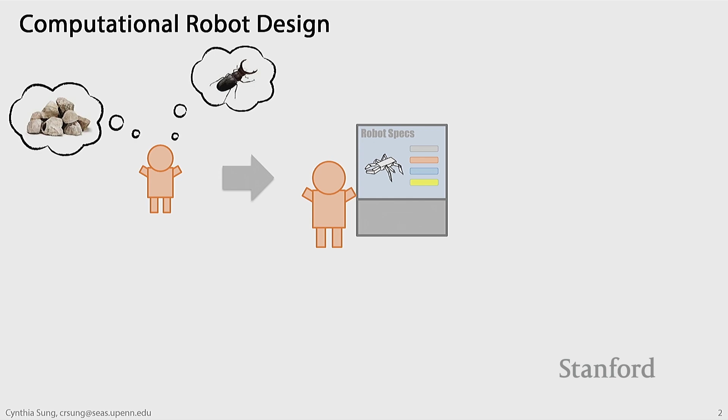Well, wouldn't it be nice if, rather than having every PhD student spend N years working on designing this robot, we were able to create computational tools that help these people to input robot specs, help them to make design decisions, really streamline the design process so that they can very quickly take their design, fabricate it in real life, and then use it in whatever environment they were thinking of, right? And so the key is really, what is it that goes into this system?

And originally, when we were trying to formulate these problems, we were saying, let's really try to specify what is a robot, what is a task, right? And so we came up with this way of describing these systems: a robot has some geometry, it has some joints, it has degrees of freedom, it has some controllers associated, right? These are all variables, design parameters that are associated with this robot.

There's also this task that we want the robot to accomplish, right? There's an environment that we care about. That environment has geometry, but it also has physics associated with it. We care about particular contact modes potentially. And then there's some objective, some performance that we want to achieve.

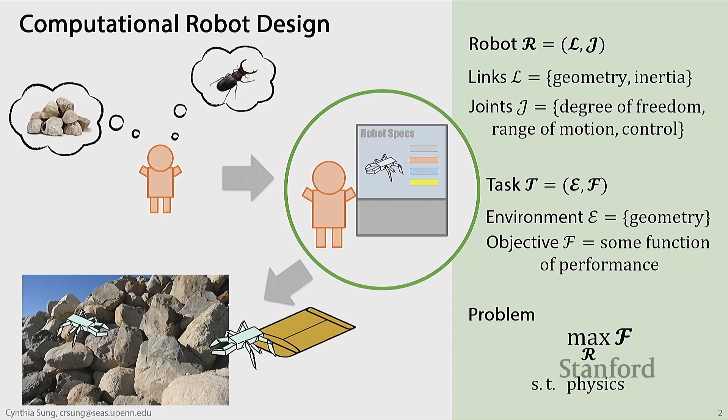And if we can write all of this down, then the problem of design is easy, right? We want to be able to achieve this objective over the space of robots subject to some constraints. And if we can solve this problem, we're done, right? So how do we solve this problem? During my PhD, we were thinking maybe one of the ways that we can approach this problem is through modularity, right?

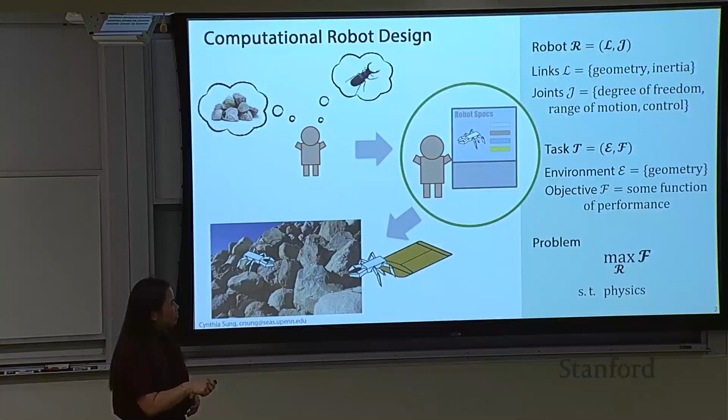Let's say there are these different robot components that we care about. Maybe we can create modules for each of these components and figure out when can we connect them together? How do we then simulate the robot in order to get it to achieve particular tasks? And we said, well, this part here is really hard. This task specification is really hard. So let's focus just on legged locomotion.

So we built this system here. We called it Build-A-Bot. This is a modular design system where you take these components here, which we hand designed, and put them into this 3D workspace. A user can come in and change the shape. These shapes are all parameterized, so we can keep track of their geometry, kinematic constraints, all of that. Users can drag in other parts and connect these parts together.

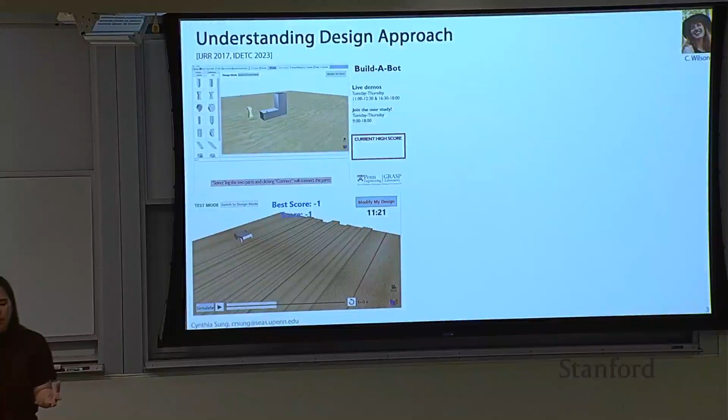And as they do that, we imposed a grammar on this system that said, if you're connecting particular types of parts together, then that implies that you're connecting them with joints or with motors, and there are certain controllers or kinematics that are associated with these structures.

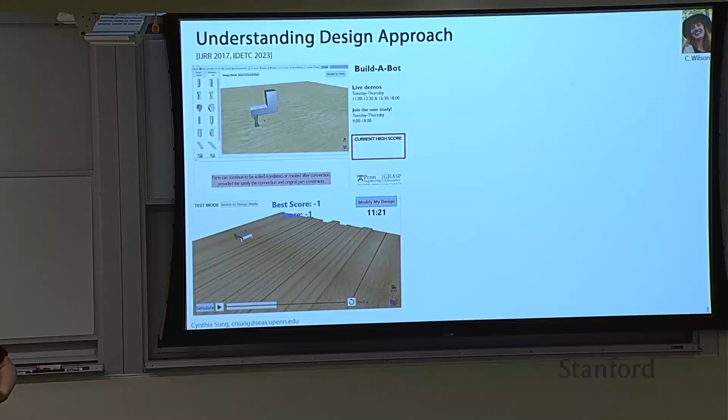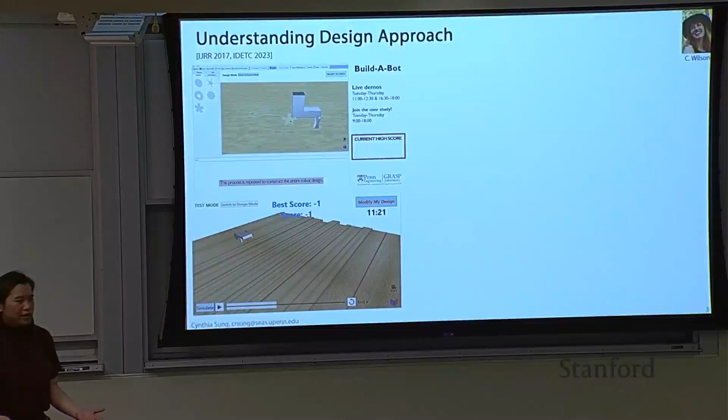And so in order to make sure that this robot satisfies fabrication constraints, we need to keep track of the geometry and also what the fabrication plan is going to be. And then if we also want the robot to be able to achieve some particular task, in this case we said, just get the robot to walk over this ground, then we can simulate the robot executing the particular gait associated with our grammar, right?

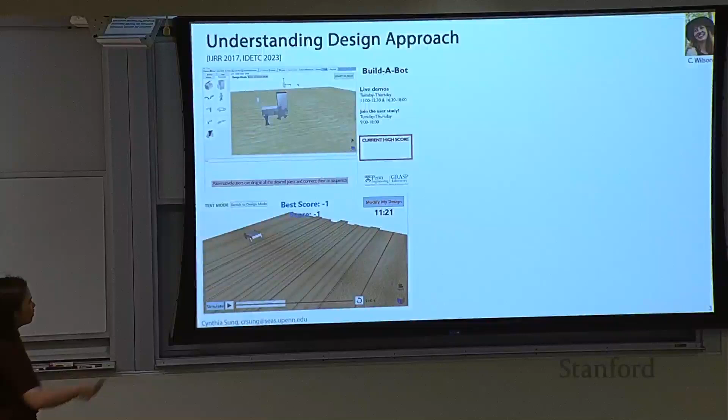So in this case, very constrained. And then tell the user what is going to happen. So in this case, they're attaching the different parts of the robot together, and then you'll see in a minute the robot being simulated. But basically, if we can modularize this design process, then we can very quickly provide the person with feedback as to how their robot's going to perform and allow them to make these design changes while making certain guarantees on geometric feasibility or the fact that this robot can be fabricated, right?

And so this software, we said, well, it gives us the first step, right? And so we can take these robots, we've shown that they can be fabricated, but let's see what other people do with this software. So what we did was, a couple years ago, we took this software and we brought it to ICRA, which was very conveniently held in Philadelphia at the time.

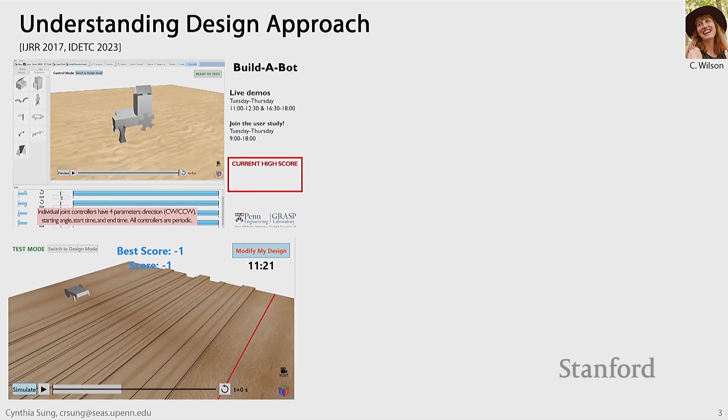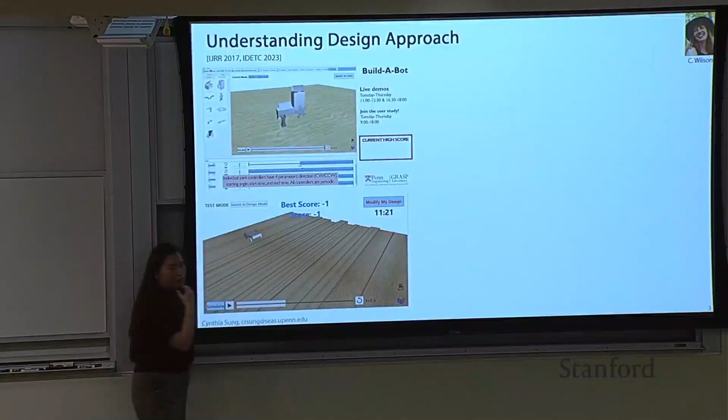And so we put a booth out, said, well, everybody, why don't you try to design a robot that's going to go over this environment? We'll give you a score, which is, well, how fast you can cross this finish line, and we'll see what people do, right? And we wanted to track how people actually approach the design process when they're given a task like this in a system that looks like this.

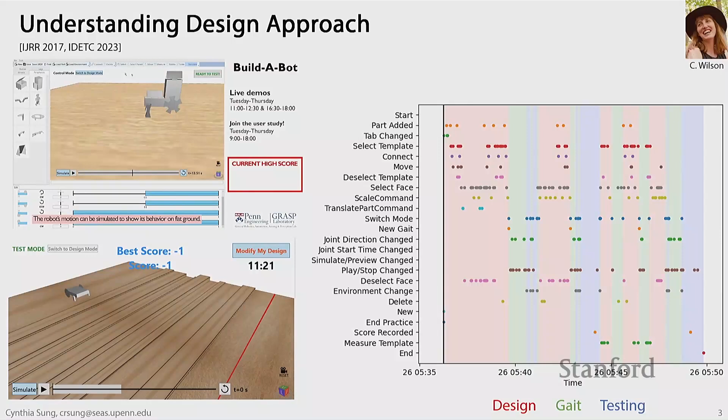So we ran this study with about 37 people. 37 people participated, ranging from undergraduates to professors to people in industry, basically the people that we could bother in the exhibition hall to interact with our software. And we tracked all of the different operations that they took in the software to see how they approached this design process. And so what you're seeing on the right here is what they did over time.

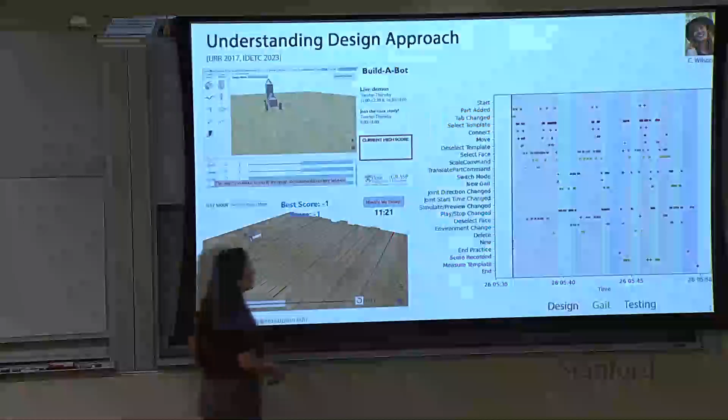And we looked at, well, what time are they spending in the design phase? What time are they spending in the gait design phase? How much time are they spending actually testing the robot? And observed the sorts of things that they were doing. And then afterwards also talked to them to say, well, what was your thought process as you were going through this design process? And so this here is an example of the sorts of actions that one particular user took during the study.

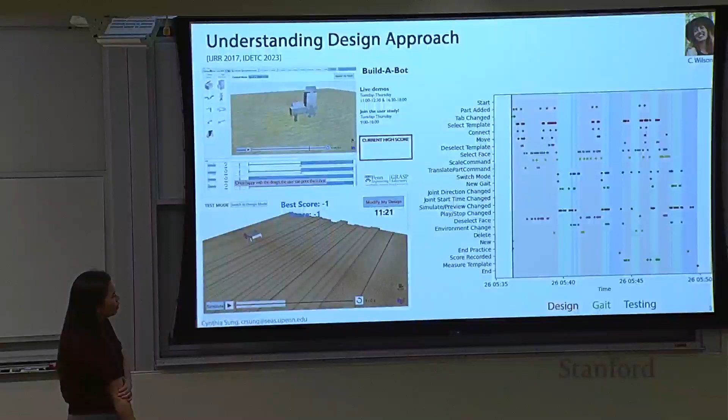And I think there are a couple of observations that I wanted to make, which is, well, we tracked their score over time to see how well the robot was doing. The max score that was achieved during the study was around 1620, I think. So this person ended up achieving something pretty close to the best score, but started out with a design that was not actually that great.

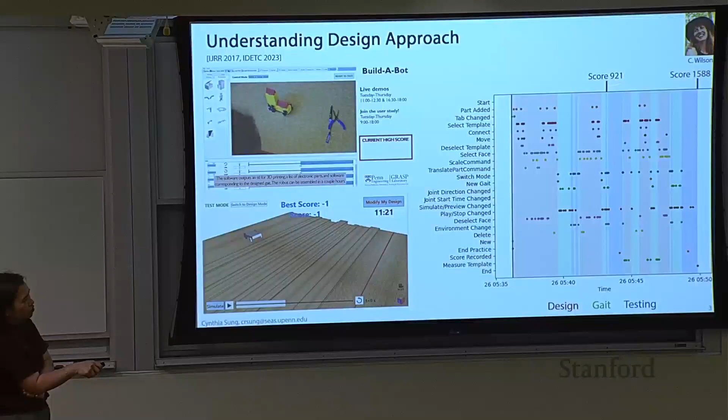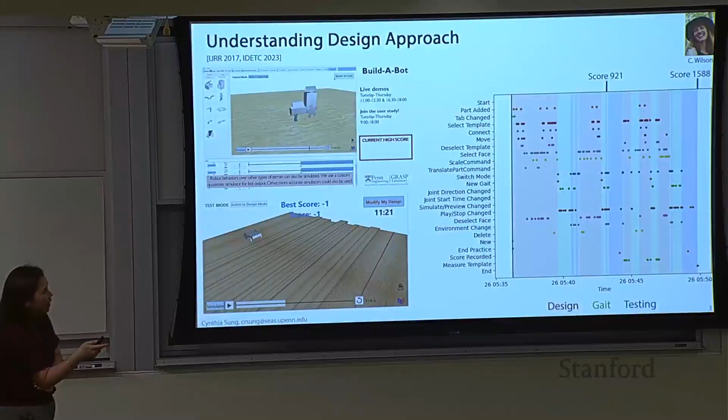But one really interesting thing that we discovered, together with Christina Wilson, who works in psychology at Oregon State, is that people really seem to zoom in on a particular design very quickly, right? And so if we look in particular at these lines here, we have the part added, how many times they modified the existing design, and how many times they deleted parts in the design, which we think means that they were changing their mind about what was going on, right?

And so there's a lot of parts being added at the beginning, right when they're starting with a new design. They did one test where they got kind of medium performance, right? And then this part here, not so much happening on the morphology of the robot itself, but a lot of tuning happening on the exact geometry, right? And so this was pretty typical for a lot of the users that were in the study.

And what we concluded was that people go into these design problems, and, well, what they're doing is not really solving the optimization problem that I showed before. They're not saying, well, what is the best possible robot? Let me look at the entire design space, really think about all of the robot parameters I can deal with, and then find the best design that's going to give me my functionality.

But rather, they really find something that they think is going to work, right? And then they kind of iterate over that particular design, right? And I think those of you who are designers, and even me myself, that's kind of the mode that we use for design, right? And so after seeing this, we kind of took a step back and said, well, what is it then that we're actually trying to achieve with these sorts of design approaches?

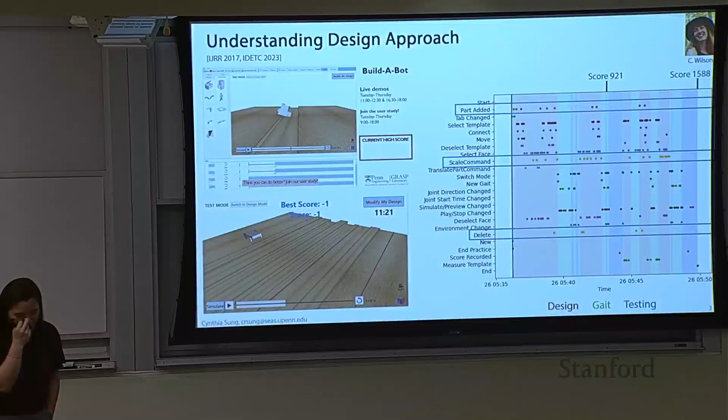Because at the beginning, when we started on this study, Christina had done a lot of reading in the literature and said, well, actually, what we've seen is that there's a difference between novice and expert behavior, and novices tend to have design biases, and experts tend to be more willing to explore the design space. And we did not see that here. We saw really everybody just zoom in on a particular design and iterate on it.

And what we thought was, well, maybe then what we're trying to do with these design systems, or when we design robots, is not actually come up with the optimal design. A lot of people are really just trying to get a design that works, right?

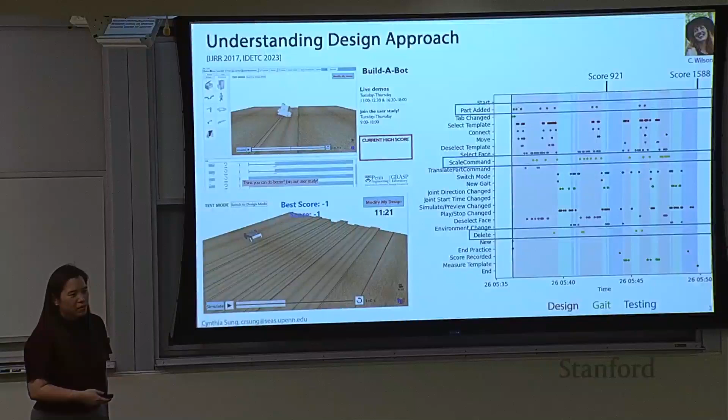And so this is related to some of the ideas that people have been throwing out in the mechanical engineering design community for a while, which is, well, what is the difference between how we think about mechanical design or robot design or design in physical spaces, and how we think about things that are very modular, like VLSI, or how we think about computer programs, right, which are also very modular.

And I really like this sequence of papers, one from 1996 and the following one 1 year after, 1997, where the first one is this title. It says, "Why Mechanical Design Cannot Be Like VLSI." And the argument here was, well, mechanical design is really, really hard.

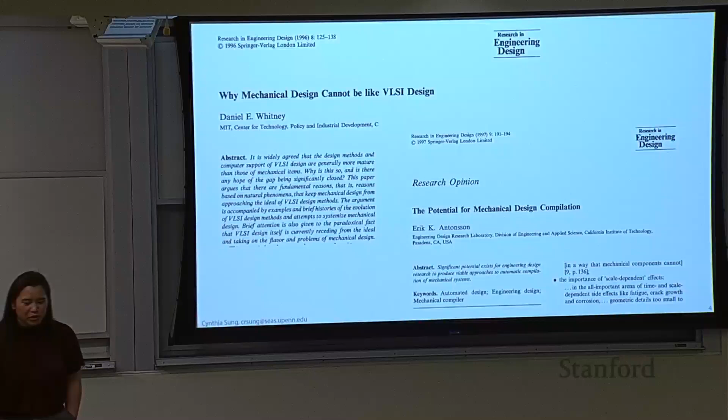The reason it's really hard is because actually mechanical design is inherently not modularizable in the way that VLSI and computer programming is. Because you have all of these mechanical components that are interacting with each other, and when you change one part, that affects the behavior of another part. And so inherently, we cannot actually deal with mechanical design in the same way that we deal with electronics, and so you kind of have to design the whole system altogether.

1 year later, there was this paper here from Erik Antonsson, which was called "The Potential for Mechanical Design Compilation," which is basically the complete opposite viewpoint, right? And this paper was actually written in response to the first one, where they said, well, you know, there are things in mechanical design that are very interconnected, very interrelated, and so when you change one part, you do inherently affect other parts. But there are also some things in mechanical design that are modularizable.

And maybe the key to thinking about mechanical design, or in my area of interest, which is robot design, is figuring out what parts of that design space can be modularized. And there's another part way at the end of the paper, which is also that

maybe also the key to allowing us to use modularity for these sorts of design approaches is to accept that sometimes when we take these compilation or these modular approaches, the design that comes out is not going to be optimal, right? And so as long as we can achieve particular functionality out of the design itself, and we can achieve something that's possible, well, maybe we're willing to make sacrifices on the other part for the ease of the design process. So this has really been an inspiration for the way that we've been approaching design and computational design for robotics in our lab.

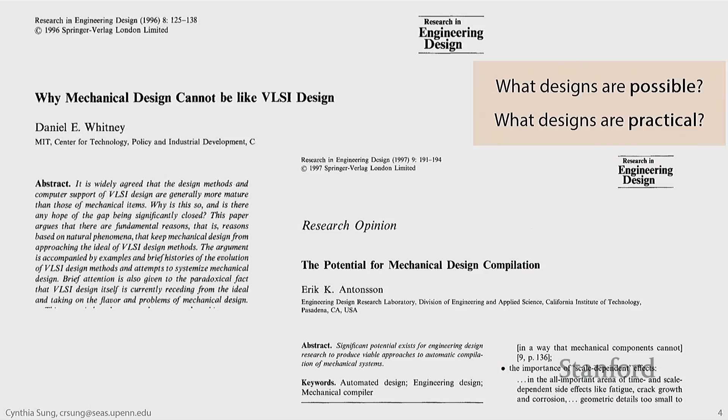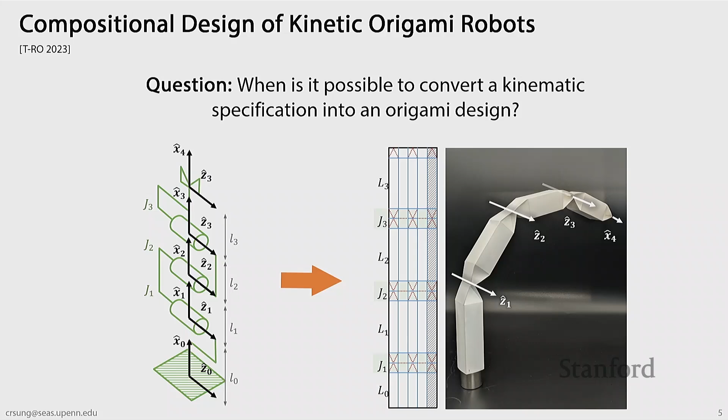So I'm going to start then with a project that we started thinking about, I guess 3 years ago now, where we said, well, let's start with a very particular type of robot. Let's start with manipulator arms. And let's not even think yet about actuation. Let's just think about kinematics.

And let's think about, well, if I want to create an arbitrary manipulator arm, serial manipulator arm, when is it possible for me to actually construct this arm? At the time, we had a very specific focus on origami-inspired design, but I'll show you later that actually the algorithm we came up with isn't necessarily restricted to origami.

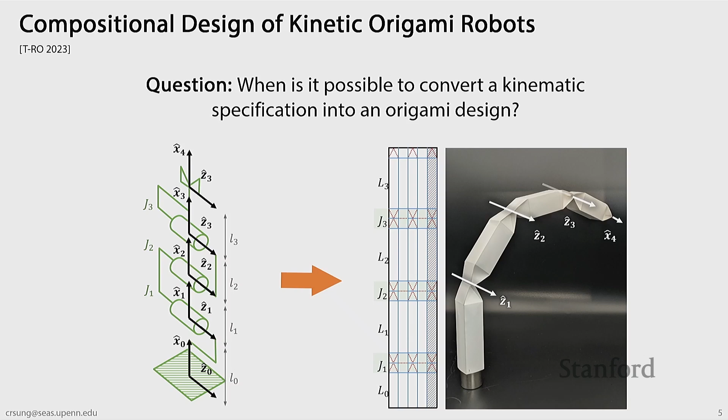But what we said was, well, all I want to do is make sure that if I have a robotic arm, I have a particular kinematic structure I care about, I want to be able to fabricate that arm. What is it that I need to do in order to achieve this particular kinematic specification? And so in order to do that, the way that we're going to specify these kinematic arms, now the task specification is very clear. We're going to use the Denavit-Hartenberg specification, which is probably the most popular way of specifying robotic arms, right?

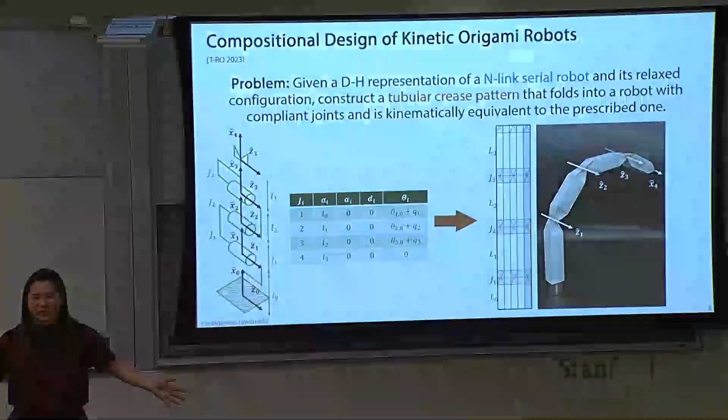So how many people here are already familiar with Denavit-Hartenberg? Okay, some people. So the idea behind Denavit-Hartenberg is that, well, actually what I care about is not the full structure of the robot, but what I care about is these axes of motion. So this is a drawing of a 3-link manipulator arm with 3 revolute joints. So the cylinders are revolute joints, and the axis of motion is down the center of the cylinder.

And if I want to describe the kinematics of this arm, I don't actually care where the joints themselves are, but I do care where the axis of motion is. And the axis of motion can be described by 4 parameters. So the 4 parameters tell me the direction of this axis of motion and the location of that axis of motion relative to the previous frame, right? And so this allows me to describe the kinematics of this structure. And if you want more detail than that, then Denavit and Hartenberg have a really great paper describing exactly what goes into this specification.

But what's interesting here is that basically this specification tells me exactly where I want the axis of motion to lie, but I don't care where the joints are, which gives me an extra design degree of freedom, right? So if I can place the joints really anywhere I want, that allows me to make this robot fabricable as long as the axes of motion are correct, right?

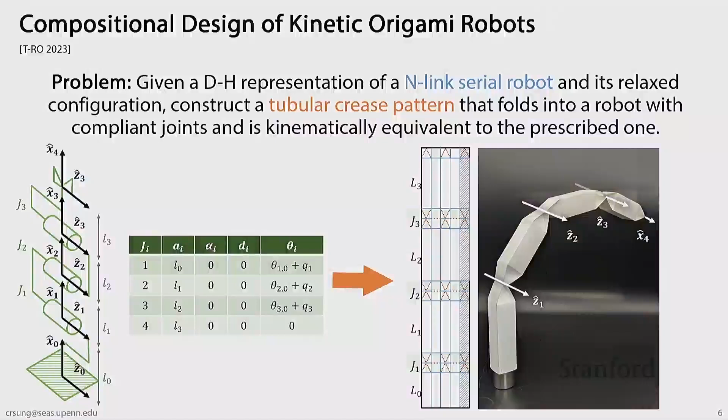And so we said, well, how do we go about then designing structures that are physically realizable, that achieve these kinematic specifications? And before I tell you our solution to this problem, I'm going to take a sidetrack. So the sidetrack that I'm going to take is on path planning under curvature constraints. So many of you have probably heard of Dubins path planning, or planning for cars or airplanes, right? These are vehicles that have been studied for a really long time in robotics research that can only follow paths with some minimum curvature, right?

So if I want this car to go from this position, this orientation, to that position, that orientation, I can't take a straight line path. I need to follow a path that consists of curves, straight lines, and then additional curves, right? And back in the 1950s, Dubins showed that in 2D, these kind of curved, straight, curved paths are shortest length paths for these sorts of planning problems. And in the 1980s, I believe, Hector Sussmann showed that in 3D these paths can also be used to describe the sorts of paths you would take from starting positions and orientations to ending orientations and positions in 3D space.

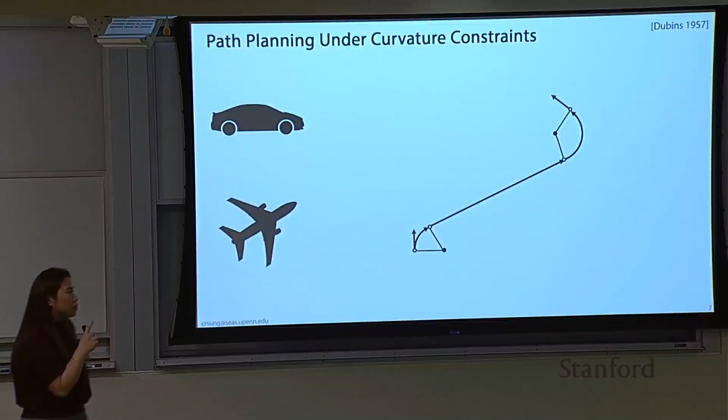Now, what's really interesting about these paths is that actually these are paths that robots can follow in 3D space, but they're also paths through 3D space that basically create rigid transformations, right? So if I have a frame down here and I have a frame up there, and I create a series of physical objects that implements these turning and straight line paths, then what I get is not a path that a robot needs to follow in 3D space, but actually a physical link that generates a rigid transformation that I can use to create a particular relative orientation and translation between my starting and ending frame, right?

And so we thought that this could actually be a way for us to approach the problem of design of manipulator arms, because what this means is that if we put a joint down here and a joint up there, as long as we can calculate and then create this path, then we have an arm that's fabricable, right?

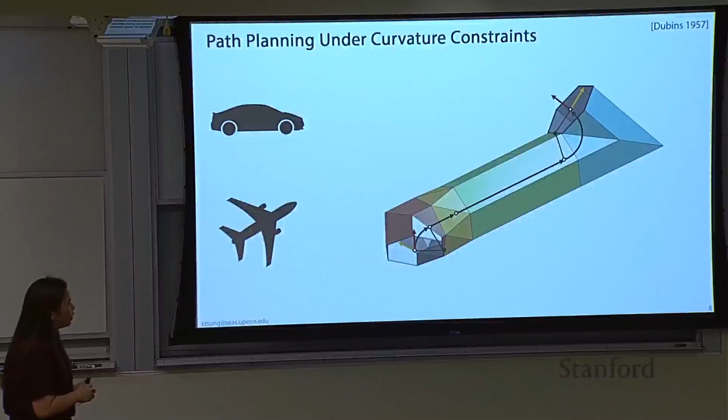So what my student did, Wei-Hsi Chen, was he designed, in this case, origami modules that implemented these different paths. So we have this module here, which gives you curved path rotation, this module here, which gives you straight line motion, and then additionally other modules that give you joint rotation and joint translation.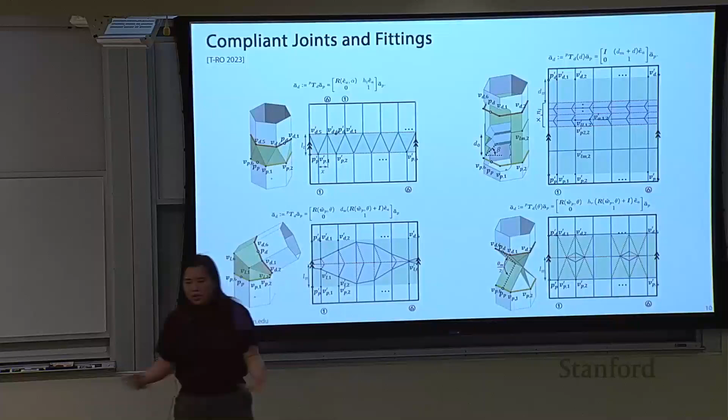And the key now then to designing a manipulator arm is actually mapping this design problem onto a Dubins path planning problem. And as long as we can solve the path planning problem and we can combine these origami modules together to create those paths, then now we have a valid arm.

So the key insight to doing this then is that actually when we choose a particular kinematic specification, in this case the Denavit-Hartenberg specification, which only gives us the axes of motion, the joint locations themselves are not necessarily fixed, right? And normally, when we're trying to design robotic arms as mechanical engineers, you try to take the joints and put them as close as possible to wherever the other joints are so that we don't have any of this extra mass or volume around. But in this case right now, I'm going to say we don't care, okay?

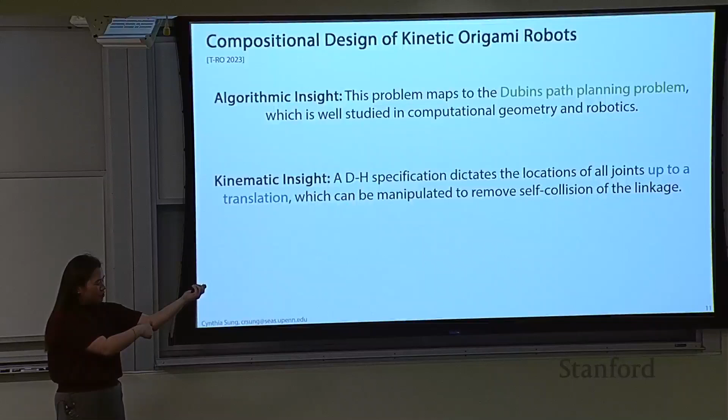So if I have my arm, for example, and my elbow here has the axis of motion down this line, actually, for the purposes of figuring out where my hand is going to be, my end effector is going to be, it doesn't matter if my elbow is right here or if it's over here, as long as the axis of motion is correct, right? And so I can use that extra degree of freedom in order to be able to design these sorts of manipulator arms that satisfy my kinematic specification.

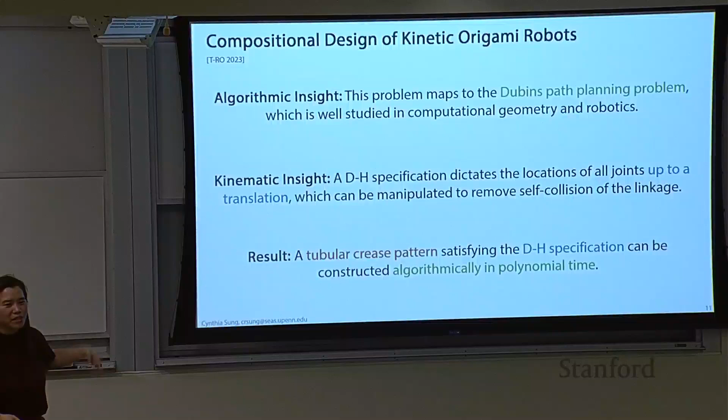The reason I can do that is because I can now pull from existing properties that have been discovered for Dubins path planning, that these paths can be calculated as long as my joints are sufficiently far apart, right? And so what I need to do now is basically go through this process of figuring out for every joint that I want to connect together, where should I place it on its axis of motion in order to bring it into a location where I can actually route these paths. Then I can convert those paths into these physical structures, and then I can do that iteratively over the entire structure of the robot, right?

And so here, what you're seeing is the process of designing a spherical joint. So what we have is these three joints here, which have axes of motion that all coincide here in the middle. That was the diagram that you saw at the beginning of the video. And then these are the paths that get automatically generated through this process of converting this problem into a Dubins path planning problem. Each of the segments of this path here get converted into the equivalent origami pattern, which in this case is a tubular pattern. So it can be either constructed through folding, or if you want to print out 3D tubes on a 3D printer, you can do that too.

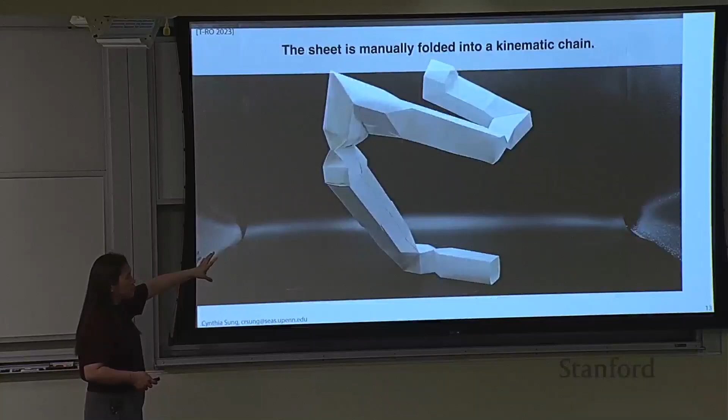But what happens is if we take this pattern and then we fold it, then we get a physical structure that lies along this path. And you can see the revolute joints in these three locations. If we draw where their axes of motion intersect, it'll be right at the center of this mechanism. So this here has the exact same kinematics as a spherical joint. Not to say that this is necessarily yet a spherical joint that you would want to use, but what we've shown is that it is possible to take these sorts of kinematic specifications and automatically generate some version of a fabricable structure that would have the correct specification.

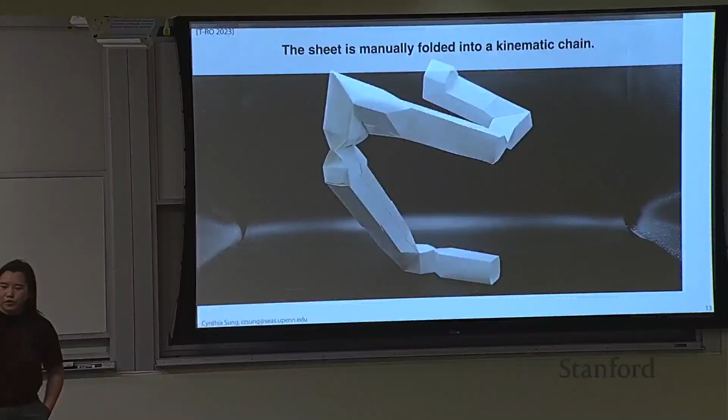So this process here actually works for pretty much any Denavit-Hartenberg specification for serial chains. And we've implemented these ideas, all of the modules, into a GitHub repo. If you're interested in designing your own manipulator arms or spherical joints or whatever it is you care about, you can download this code and input your own Denavit-Hartenberg specification and see what comes out.

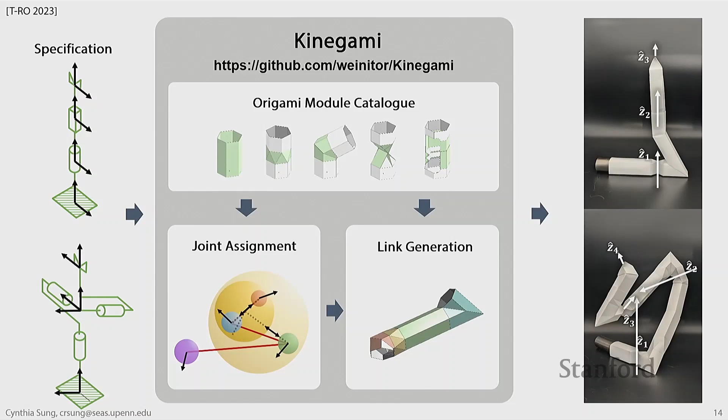So in this case, we basically said we just want a kinematic specification to a fabricable plan. What are we going to do with this result? Well, now that's the second question, right? How do we actually think about when these sorts of designs are practical? And so we decided that, well, maybe we'll try to use this sort of idea in order to design a quadrupedal robot.

Sounds fun, right? So what we decided to do was say, well, we want to design a quadrupedal robot. We wanted to have 8 joints throughout the entire body. In this case, this is not a serial mechanism, right? This is a robot with 4 parallel legs. But actually, you can break it down into 2 serial mechanisms by cutting the robot in half, right? And so the way that you can then take the tree associated with the robot and decompose it into chains is we can find longest chains throughout this graph, right?

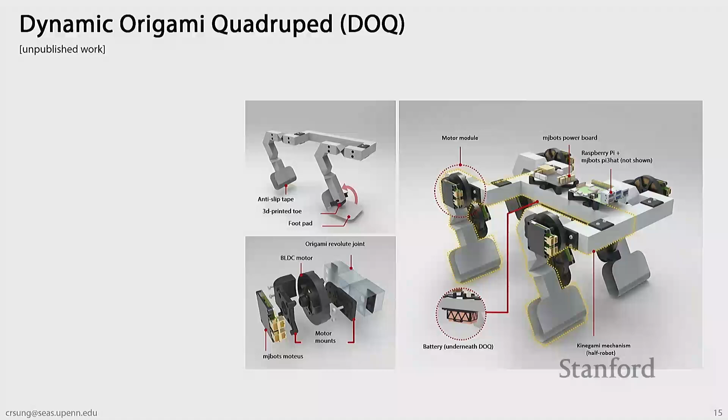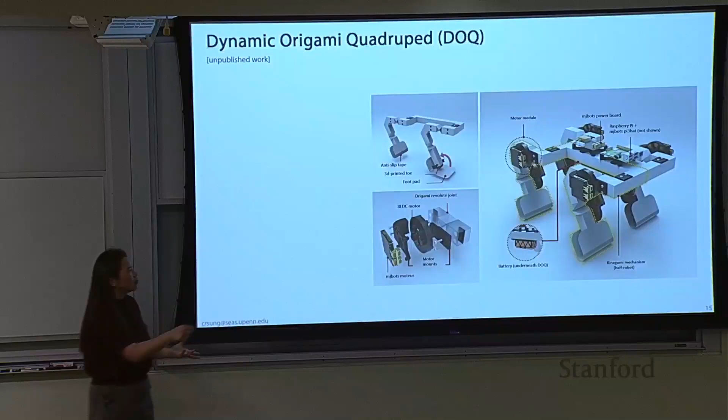And so now what I need to do then is if I want to design a fabricable version of this robot, I need to design the kinematic chain associated with the body. And then I also need to figure out all of the actuation, control, everything else associated with it, right? So this part here, presumably, is now relatively complete, right? I need to figure out where the joints are that I care about, and then I need to design this fabrication plan. The key now is how do I make this whole structure more compact in order to make this robot not really unstable, but still allow me to input all of my actuators, right?

And so the way then that we start thinking about this problem is we can still build on the insights from designing arbitrary kinematic chains I showed you before, but now we also need to take our actuation into account. Our actuation affects two things. It affects the volume of space that this actuator is going to take up, and actually the joint location affects how much torque it is that the motor is going to need to produce, which then affects its volume, right?

So the volumetric constraint is not too bad. Actually, since we were already treating this problem as a path planning problem, what we need to do is route these links through 3D space while avoiding whatever space the motors take up as if they were obstacles, right? And so these sorts of paths can now be generated that allow us to place these motors. At the same time, the torque requirement imposes length constraints.

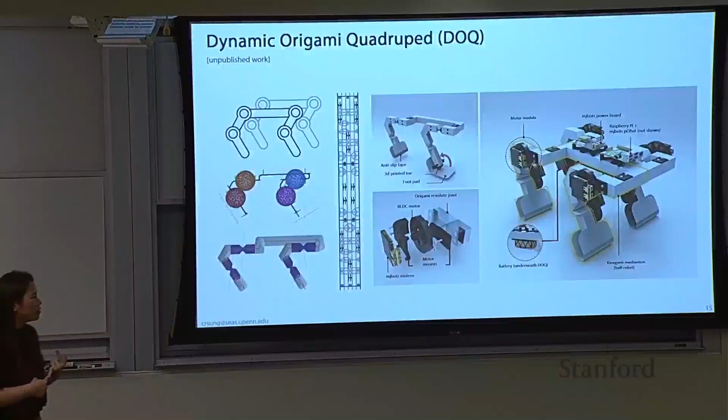And so now what you can also do is, instead of arbitrarily placing these joints in 3D space in such a way that these paths can be routed, we can add an optimization on top of that that allows us to make everything as compact as possible while satisfying all of the constraints associated with routing Dubins paths, right? So if we do that, then we get a chain that looks like this. This chain here has the kinematics that we care about for the robot that we're trying to build, but it also has space in there for us to mount all of the actuators that we've spec'd out to produce this robot.

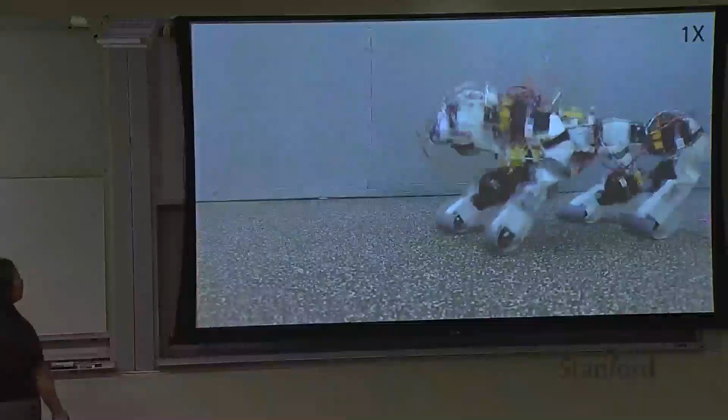So what you're seeing now here is the resulting quadrupedal design. This is a body that has been folded by hand by Wei Shi. The body of this robot, though, has been designed through this algorithm that I showed you previously, where he basically specified exactly where he wanted all of the joint axes of motion to go, and then folded this and then put all of the motors on. This is the robot walking, and then what you're seeing here is us also trying some more dynamical gaits, the robot bounding, and being able to withstand the forces and torques associated with creating these maneuvers.

I will say that this is actually the fourth iteration of this robot that you're seeing here. The first iteration that we designed, we actually forgot to leave room for all of the motors that we would need to put on top. And so when Wei Shi tried to mount all of the motors and electronics, none of them fit. There were huge collisions. It didn't work. But then we were able to add in all of the extra additional constraints associated with routing these paths around the motor volumes. And what you're seeing here is the result.

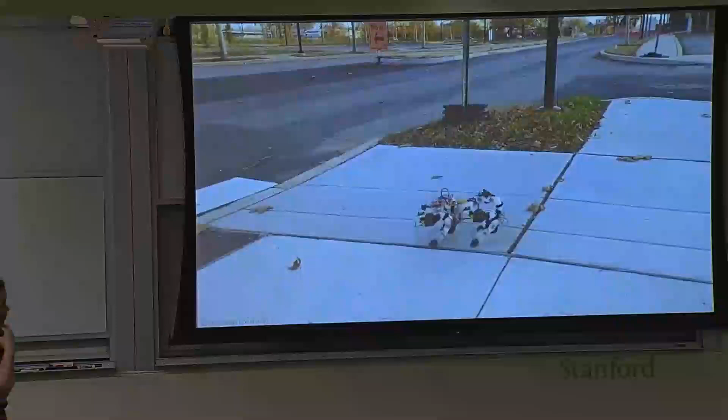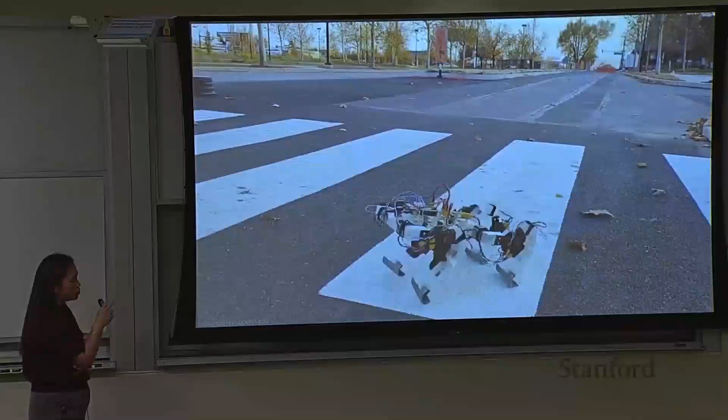So with these robots here, we've been able to take advantage of our algorithms for generating these bodies to iterate over the design within a few days at a time. So between the first version, which couldn't take any motors on it at all, to the second version was about 3 days. And then after that, every time we run the robot, we notice an issue, oftentimes material fatigue, then we can iterate over the design within another few days to a week.

And the degrees of freedom are also lower because we decided we didn't want to go for the full 12 at the beginning. But in terms of size and capabilities that we have, they are pretty similar to existing quadrupeds that other people have built. So, any questions so far?

Oh, yes. I guess just curious, how did you incorporate all of the force and torque constraints into the kinematic specification to make sure it doesn't collapse under its own weight? Sure. So the force and torque constraints, which I really glossed over here, I guess there are two different types that we need to think about mainly. One of them is the actuation torque, right? And then the other one is forces on the robot body that will affect its ability to withstand the weight of all of the other components.

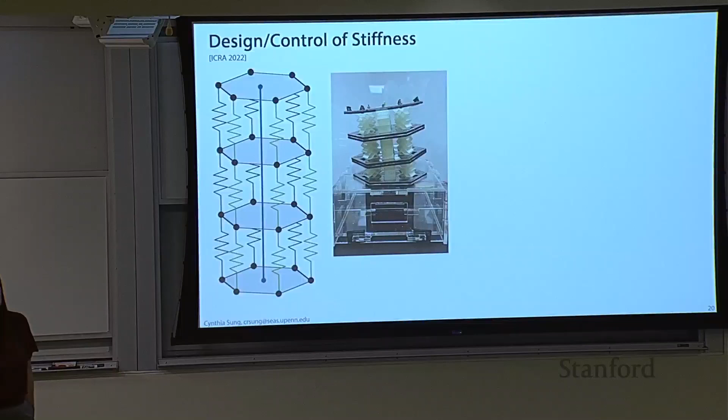So if I take a tendon and I pull down the center of this platform, the softer springs are going to compress first, right? And then the stiffer springs are going to compress. And the way that the structure deforms is going to depend on the stiffness distribution. This is a really abstract version of what was happening on the legged robot that I showed you on the previous slide, where in that case the stiffness is dictated by the particular geometry of the fold patterns, right? But we start with this abstraction because it allows us to think about the structure in a little bit easier way.

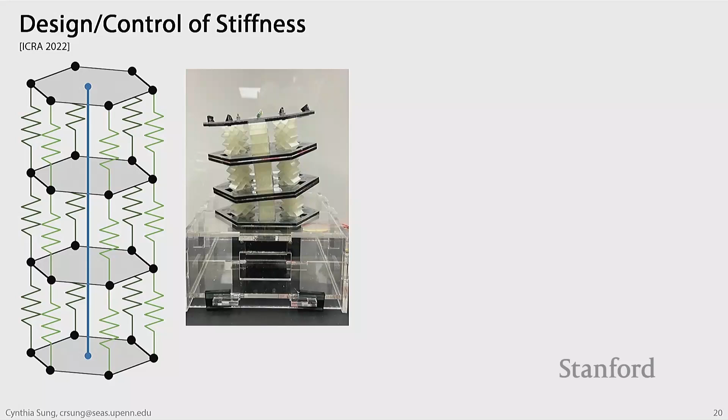So the way that this structure then deforms depends on the energy landscape, right? So if I'm pulling the string this slowly, then this whole structure is going to tend to bend in the direction that brings it to a state of lowest energy.

And what we did was that for these particular types of tubular structures, we can construct stiffness matrices associated with them, but those stiffness matrices have a particular structure in them, right? And so actually for structures like this, the tubular structures that we've been designing, the way that these robots deform has an analytical solution. And so we can construct these matrices associated with kV. These are the stiffnesses at each of the springs.

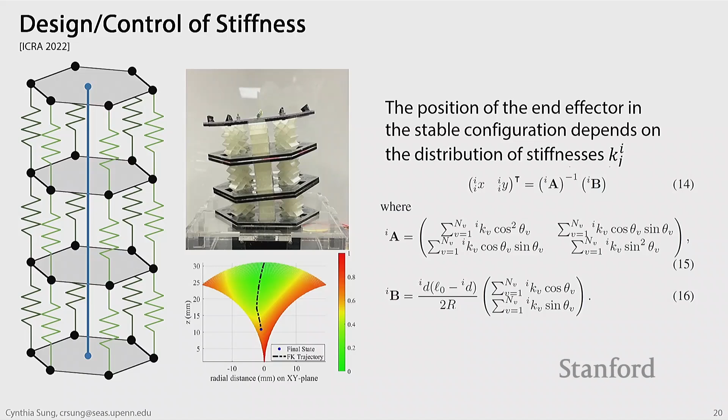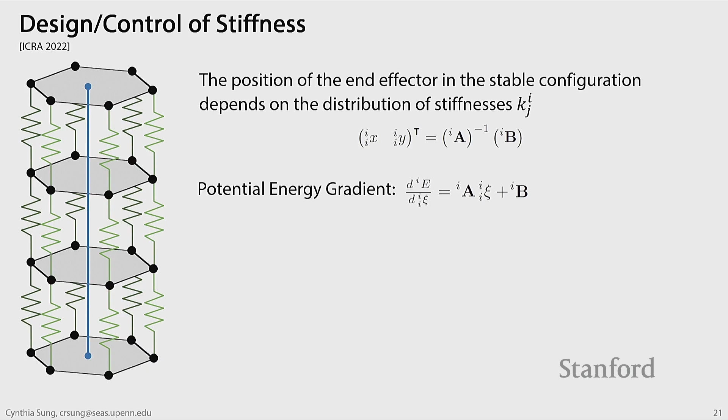Here we have theta V. V is basically the ID associated with springs along the circumference of this structure. And N_v is the number of springs around the circumference of this structure. And then the way that this structure then deforms is dictated by basically this matrix equation. So what that means is that actually if I have this sort of solution, then I can use it in order to figure out which direction the structure is going to deform when the stiffness changes, right? I can find energy gradients in this energy landscape, and I can manipulate those gradients in order to get the structure to tend to a particular new pose.

So what we found is that what we can do is use gradient descent-based approaches very similar to potential fields and potential field planning approaches, right? Where basically we're getting these structures to move along these energy landscapes and tune the local minima of these energy landscapes so that the deformation is the one that we care about. What we do here is not change the lengths of tendons or actuate DC motors the way you might normally think of in traditional rigid robotics. But what we're thinking about here now is stiffness change, right? And so these correspond to material properties that are associated with the springs throughout the structure of the robot.

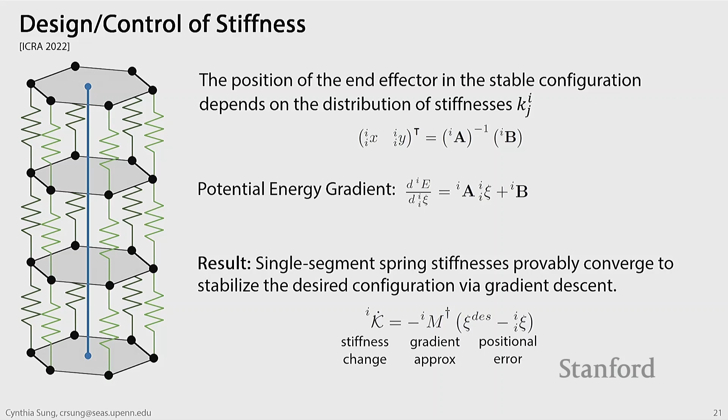So if I take this idea and I say, well, what I'm going to do is now assume each of my springs is an actuator, right? And let's say that I want this manipulator now to bend in a particular way. For this particular scenario, I want it to be such that when I pull a tendon down the middle, the whole structure is going to deform and the robot is naturally going to get its end effector to this purple triangle. I can do that by manipulating the stiffnesses of these springs.

So what you're seeing here in this animation is each of the thicknesses of these springs here corresponds to its stiffness. This robot here is basically just following gradient descent in order to update those stiffnesses and get this robot to deform into the right shape. Once this happens, I can now take this stiffness distribution and use it as part of my design if this is the particular deformation that I care about, right?

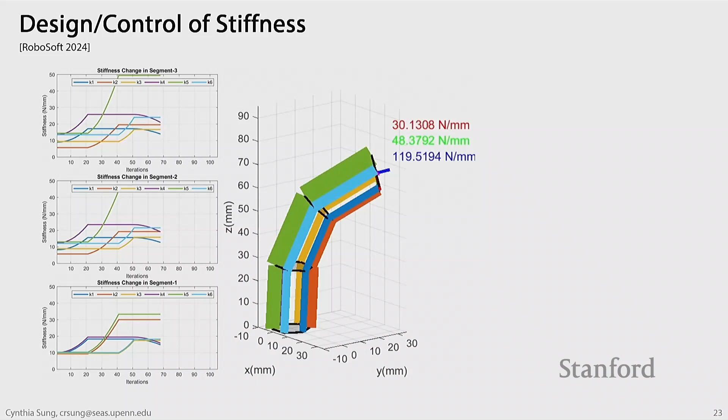What's really interesting is that if I'm modeling these soft robots in this way, then I have a lot of extra degrees of freedom, actually, right? And so this robot here, I can get the whole structure to deform so that it curves and the end effector hits this purple triangle. But I can also then uniformly scale all of the stiffnesses so that I can achieve these configurations with greater stiffness or greater softness, right? And so actually, since the system is now over-actuated, I can use these extra degrees of freedom to tune the stable configuration and the strength of the robot at the same time.

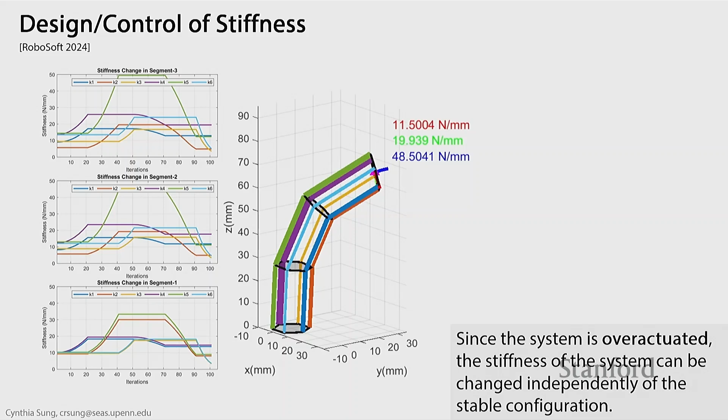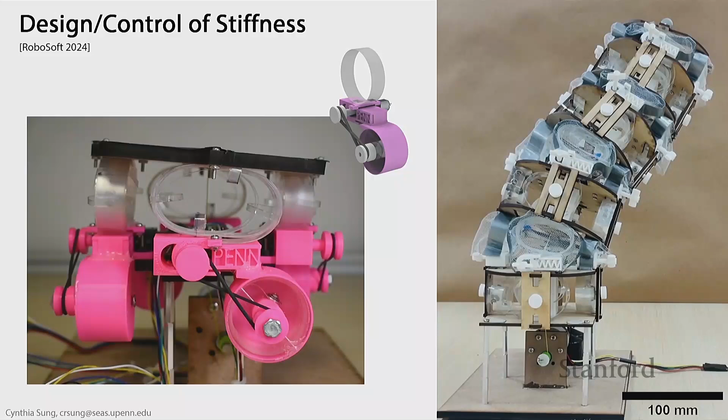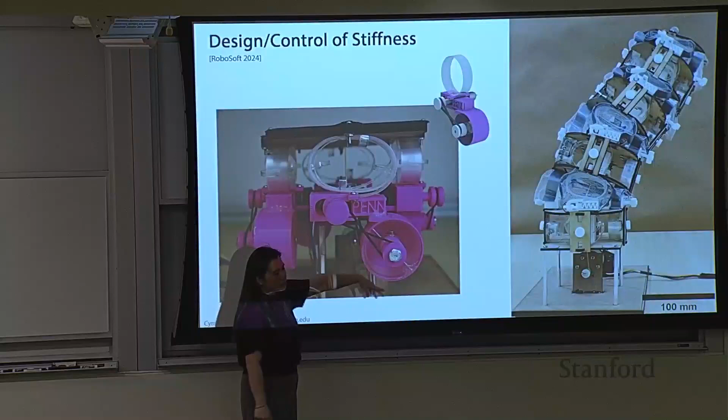So these sorts of ideas, I think, really highlight the way that our lab is now headed, which is to think about how these sorts of design problems can be cast as also these planning problems. And I can take these sorts of ideas where I say, I want these robots to follow gradient descent in stiffness and implement them either in real time, which is what you're seeing here, where we designed these electromechanical actuators to be able to tune stiffness on the fly. Or we can take the results of these sorts of approaches and then implement them onto fabricated systems. What you're seeing there is the same system, but without the motors. And so that one, you change the stiffness and then it deforms in a particular way, in this case, an S-shaped curve.

So those are the sorts of ideas that we're now starting to think about in terms of how do we think about these extra properties of the robot, these sorts of material stiffnesses, as an example, and treat them as actuators, potentially, or actuatable degrees of freedom that now allow us to take advantage of existing approaches to do design, or, if in the future we manage to get these tunable stiffness actuators to be smaller and more compact, for planning.

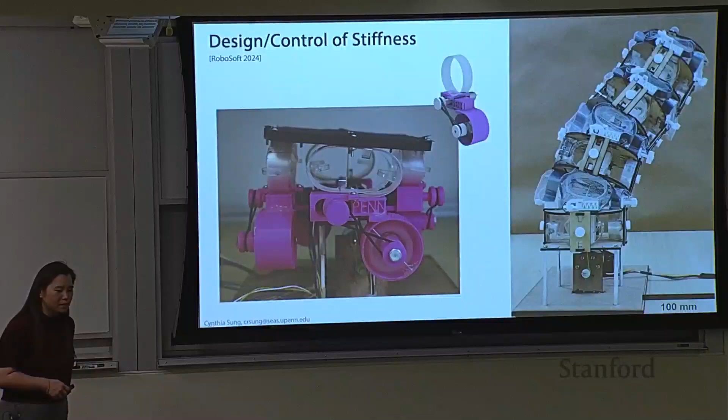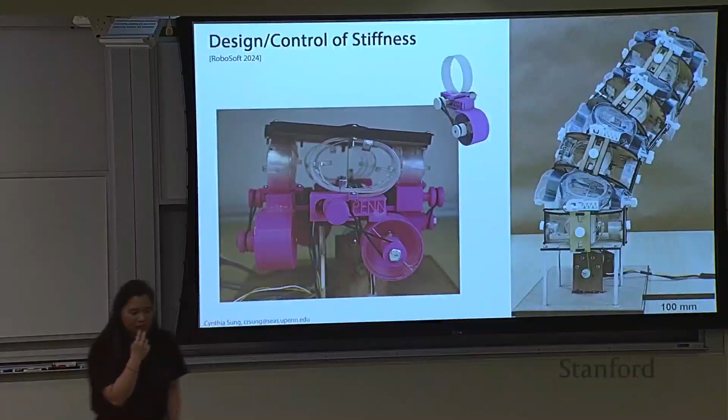Okay. So in this case, I talked about material stiffness, but I wanted to take these last few minutes, I believe, yes, to give you a preview of where we're taking this work in the future beyond just robot body design. So these sorts of ideas work not just for soft robots, but we've started to learn that they allow us to start thinking about how robots also move on compliant surfaces, or how we think about the compliance in the robot combined with the compliance of the environment.

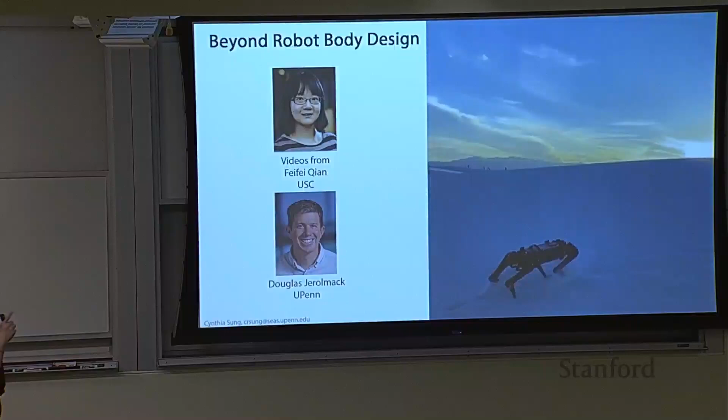So what you're seeing here is videos not from me. These are videos from Feifei Qian at USC and Doug Jerolmack at UPenn of a quadrupedal system, commercial quadrupedal system, using its gait that it comes with to try to walk on a sandy environment. What happens here is that the sand is very compliant. You're seeing it's kicking up sand every time it walks.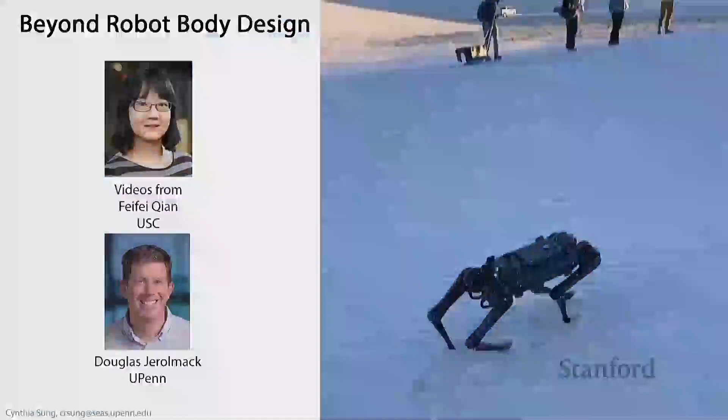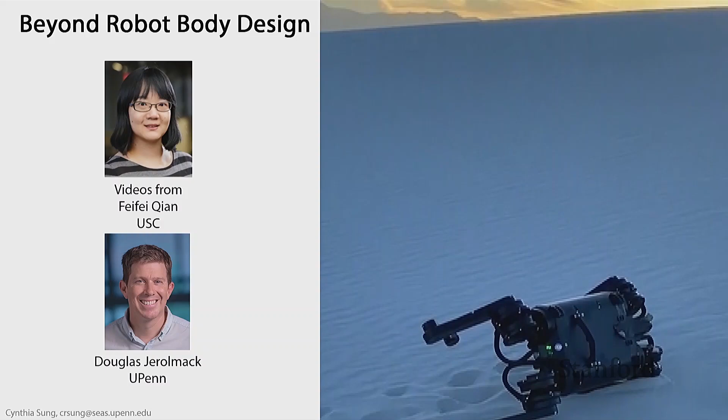Depending on how much compaction the sand has, the robot is feeling different forces coming from the ground. And when it gets to a particular type of ground, it can't handle it, right? The way that the ground deforms makes the robot go unstable, and it flips over, right? At the same time, these folks have found out that actually you can use signals from the motors in these robots in order to detect ground forces as the robot is walking.

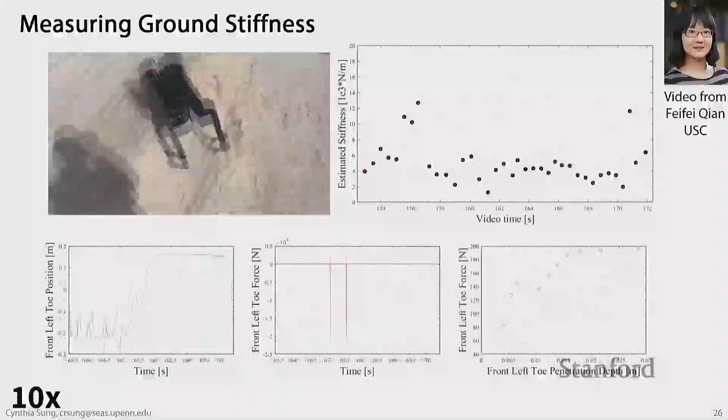So what you're seeing here is another video from Feifei's group where she's just having this robot now walk in white sands. And as it's walking, it's recording the currents coming in at the motors and converting those currents into forces. At the same time, this robot is tracking the positions of all of its joints, so it can also figure out how much the toe is intruding into the ground.

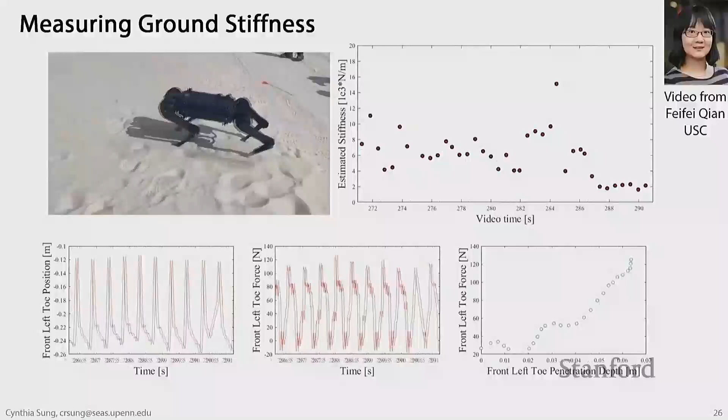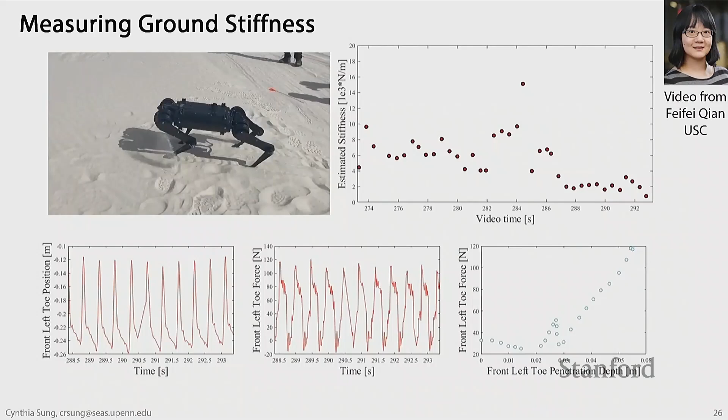And what you get are force displacement curves for the robot's foot into the ground that look like this. And so actually these sand-like environments, they look a lot like springs, right? And so Feifei and I were talking and we said, well, actually, this is a really interesting way to then think about robot interactions with compliant grounds if the compliance is very spring-like.

And the way that we can model these sorts of robots looks very similar to the segmented manipulator arms that I showed you before. In this case, now we have a rigid body that is the robot's body itself, legs, which you can control to act like springs through PID controllers, right? And springs which represent the actual ground, right? And so we can try to figure out how to tune these material properties, right, in order to get the robot to be able to walk stably over these sorts of surfaces.

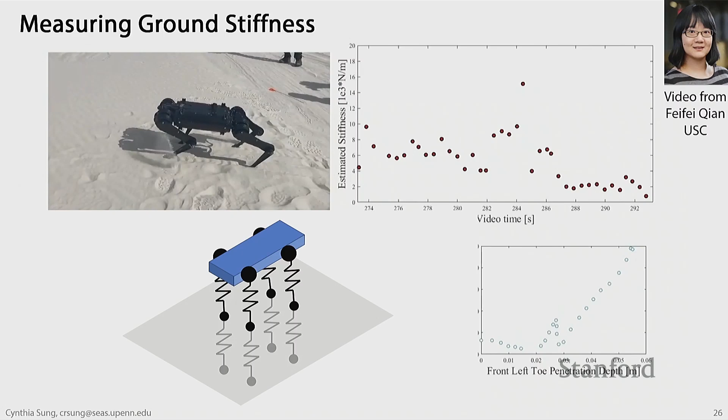So this was the start of a new project we recently started in November that we're very excited about. This is a project that is part of NASA's LuSTR program that we lovingly call TRUSSES. It stands for Temporarily Robots Unite to Surmount Sandy Entrapments, Then Separate.

The premise behind this idea is that robots now can take advantage of their sensing to detect interactions with the ground. When they do that, they get a sense of these ground properties and they get a sense of how compact the ground is, and what will happen when they try to execute particular walking maneuvers on this ground. And then based on that information, we can design configurations for robots that allow them to navigate over these environments more reliably.

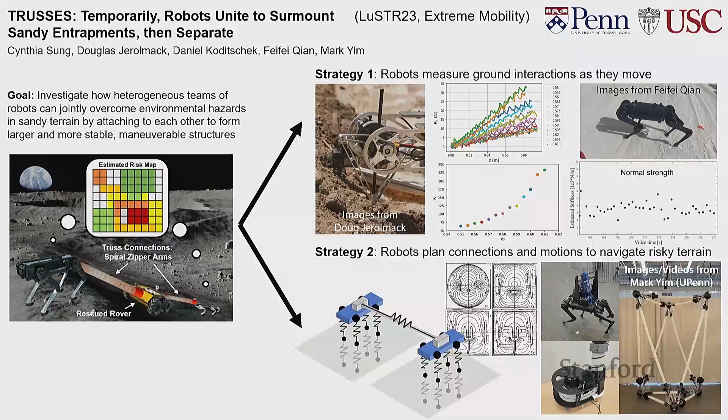So the underlying hardware behind the systems that we're going to be working with is the spiral zipper and the variable topology truss that Mark Yim is working on at UPenn. And the idea is that then we can take these trusses and we can connect robots together in order to create these sorts of networks where the robots don't necessarily just have the interactions between their legs and the ground, but they can also apply forces to each other to create lateral motion if they need to resist particular types of instabilities.

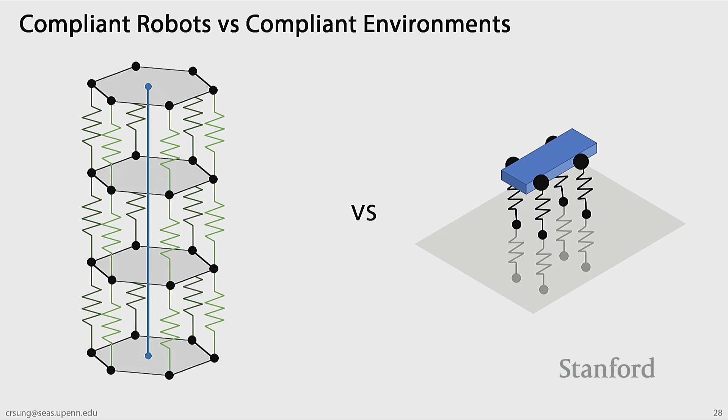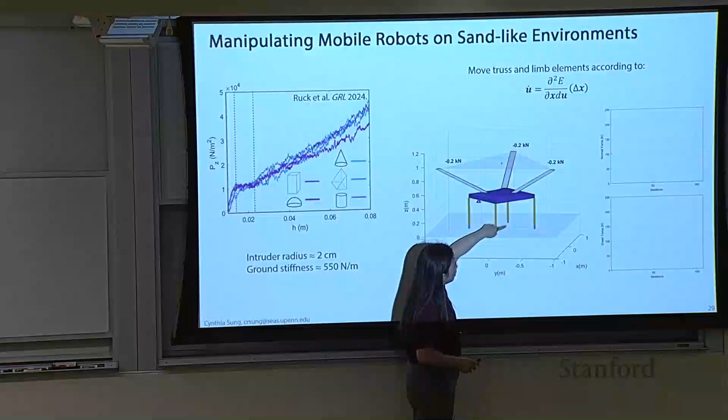So the idea is then we can take all of this work that we've been thinking about on the material property side and the physical design side, and now use them to also come back and do more interesting planning. So I'm running out of time, so I'll just show this video real quick, which is basically the newest version of the controller that I showed you before for a manipulator arm, but now is a robot here with 4 legs. What you're seeing here are reaction forces from the ground and trusses connected to it that are trying to move it around in this environment. We'll see whether it plays.

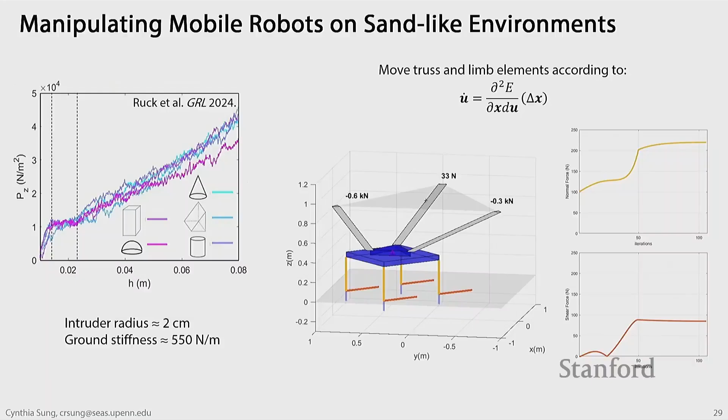Okay, so the idea is that, let's say, another robot is connected on this side. How do we move this robot around using these truss changes, but also changes in the leg interactions down here? And we can move these robots over these sandy environments, these spring-like environments, by using very similar controllers to what I showed you for the soft arm.

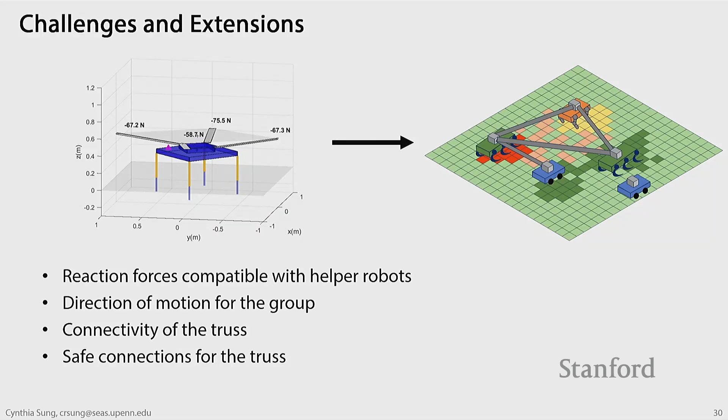So looking forward, I think this project is really exciting to us because it really allows us to think about the interaction between the design of the robot and the planner. What we're looking at in the future is how we think about reaction forces that are compatible with the other robots that are actually doing this manipulation, directions of motion that allow this group to move towards terrain that is more safe to them, how we think about the connectivity of the truss now, because up until now, I've specified a particular network that we're analyzing, but now we have the ability to design the network to produce the sorts of forces that we actually care about.

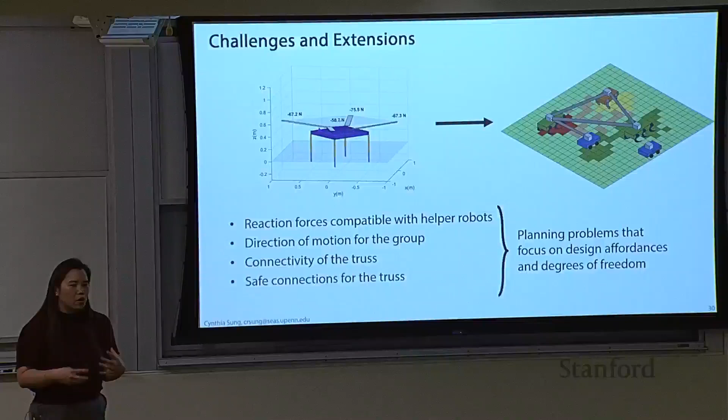And we can simultaneously think about how these robots get into the right configuration to actually connect in these ways. All of these problems here are planning problems that focus on what design affordances there are and what degrees of freedom there are and how we can manipulate those degrees of freedom in order to get more capable systems.